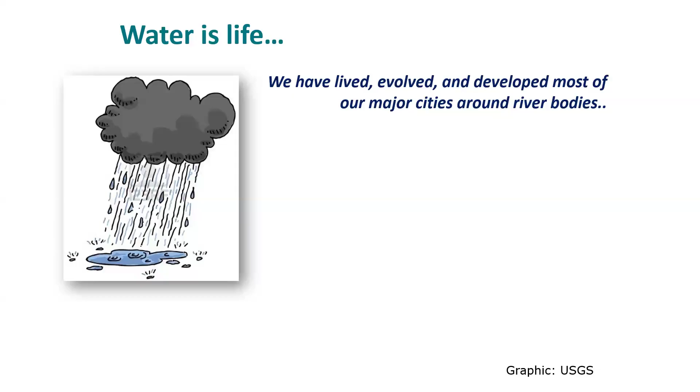Water is life. We have lived, evolved, and developed most of our major cities around river basins and river bodies. Take Accra, for example, you have the Odaw as one of the major rivers or basins. This is a familiar sight, and flooding is not restricted to Accra or Ghana, it's all over the world. But not so familiar is the fact that we have a lot of trash, and in this day and age, kids swimming in trash is very deplorable. To really solve a problem, you must understand its origins, sources, causes, evolution, and current state in order to chart more sustainable solutions for the future.

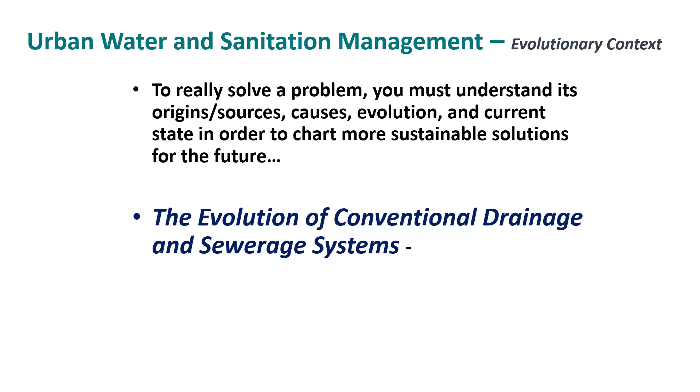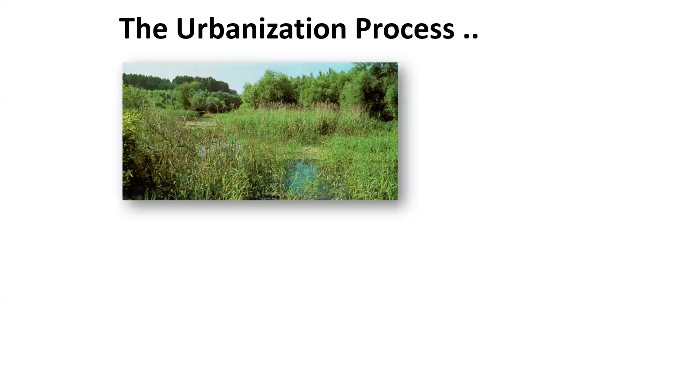So I want to start by talking about the evolution of conventional drainage and sewerage systems, because once we understand that, it puts the current situation we face into perspective. The root cause of all of this is the urbanization process. What's the urbanization process? It's taking a landscape where, when it rained, it soaked into the ground and natural drainage occurred, and building on that land. The way we build, everybody takes a plot of land and completely builds it right to the boundary wall, with no space left on the lot. Increasingly, we need some kind of infrastructure to address drainage and wastewater issues, and that's the canals and channels we build for stormwater drainage and the like.

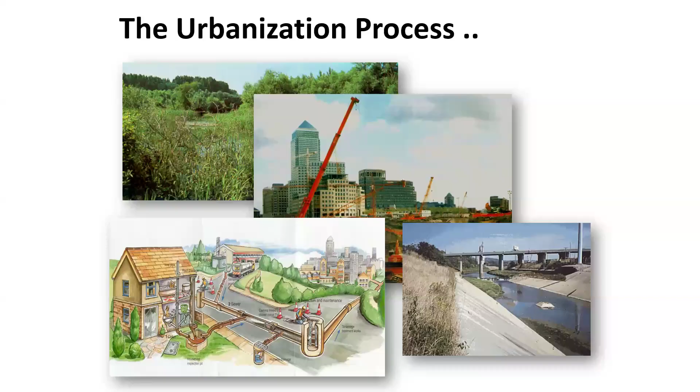The evolution of conventional drainage and wastewater systems has been, in my view, one-dimensional. When you look at the history of its evolution, we started off with open channels in places like the UK, and then potable water came to homes. They connected wastewater into the open channels, which created problems of smell, so they covered up the open channels, that's how the sewer was born. That open channel then conveyed water to a watercourse, and with increasing populations, the watercourses became polluted, which is how sewage treatment also started. So you realize it's all in response to a problem that's been observed, we're chasing our tails all the time. When you look at what I call the one-dimensional approach, you realize the focus has been on the wastewater side.

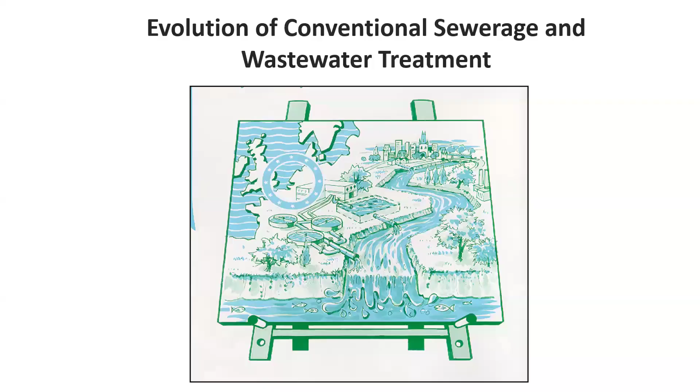So, like I said before, you realize that the issue we face is that the solutions and paradigm governing how we've addressed the problem has been a feedback control system where we observe a non-desirable effect and we try to do something about it. It's been a fight-flight feedback loop. The technologies that have evolved have all been based on reactive, curative problem solving. Let's get rid of nuisance water, out of sight, out of mind. And that's how it has resulted in the kind of drainage systems and wastewater treatment systems we have.

So we need to look at it from a different perspective. But one thing we need to realize is that sewerage systems have made a real difference in our lives. There's this saying that it's done more for mankind in the 20th century than all of medicine. And that's simply because we broke the cycle between humans and their waste. So sewerage systems have done more for mankind than all of medicine. That's what we really got to realize. So this profession is a very important one.

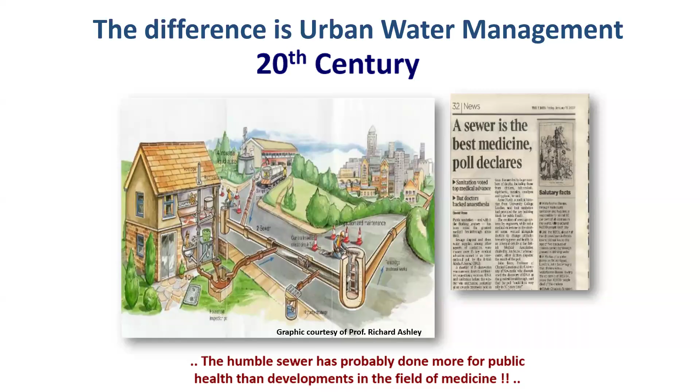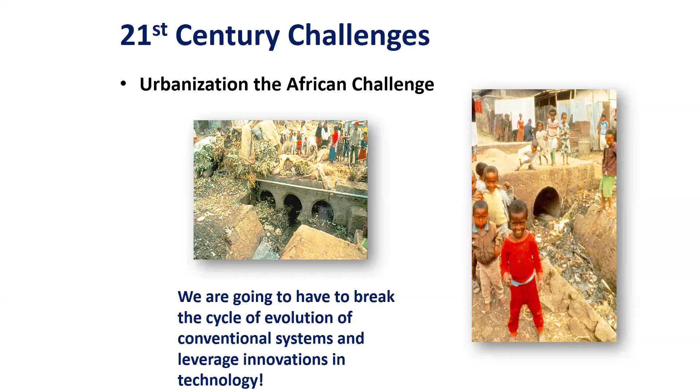Now, in Europe and places like that, they've evolved their systems, so they have sewerage systems, wastewater treatment, and the like. Now, in the 21st century, in terms of the urbanization challenge of Africa, we have a situation where our open channels are also receptacles of solid waste. So my question to us is, are we going to have to break the cycle of evolution of conventional systems? And are we going to be in a position to leverage innovations in technology? That's what some of my talk this evening will be about, how we may be able to leverage some innovations in technology to address this very challenge.

I say we are going to need to move beyond the conventional. What we're going to have to do is address water and sanitation management in an integrated, holistic manner, taking into consideration all facets of the water cycle, including stormwater drainage, wastewater treatment, and also solid waste management. It's really a big challenge.

And if we don't do that, there are lessons from the past. For example, you go back to 1665 or thereabouts, that was the last bubonic plague in the UK, and about a quarter of the population of London died or perished at the time. We've had a scare in terms of COVID, which is airborne, but we really had no scale-intensive waterborne outbreak. But if we had something on the scale of bubonic plague, Accra has a current population of about 4 million, so you're talking about maybe 1 million people dying. It's very serious, but we take it for granted. And it's real, it can happen.

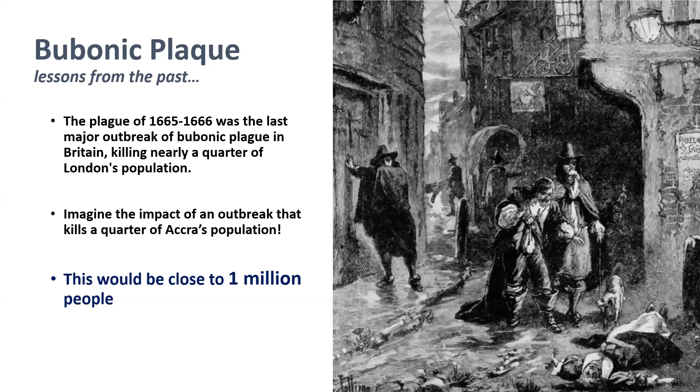So let's talk about integrated urban water management. I have what I call simple equations to describe management. Rain plus drain equals pain. What's this all about? When it rains, we have drains that convey the water, and increasingly, as we have more urbanization, the rain plus drain causes pain, which is the flooding that we observe.

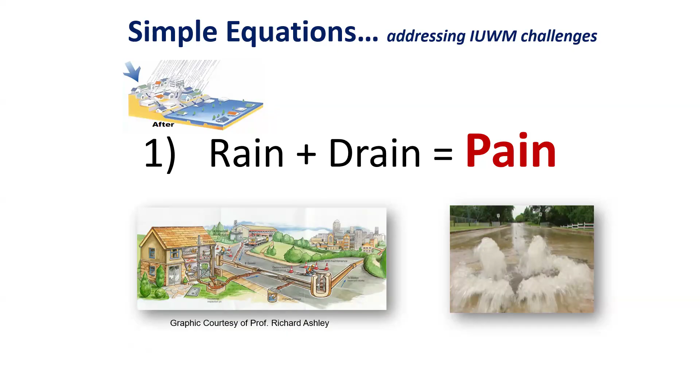Why is it so? It's because we've designed based on getting rid of water as quickly as possible on the basis of peak flow. So those of you who know the fundamental equation you're familiar with, Q=CIA, where C is the runoff coefficient, I is the intensity of rainfall, and A is the drainage area. Your objective is peak flow, and you design your system to convey that peak flow away from the area.

In some catchments, when the catchment is not highly urbanized, the C, for example, might be at 0.3. When you urbanize the catchment, it becomes about 0.9. So you design a catchment initially to have 0.3 as the C, and that's the flow rate. Now, after you urbanize it and get to 0.9, the flows increase threefold, but your drain has a capacity based on the 0.3. I think that's the kind of situation we have also in Odaw and other places, where initially when the system was designed, Accra was not as well developed as it is now.

My equation for addressing the problem is what I call rain plus spin equals gain. And that is controlling the flows such that you don't inundate your downstream system. So upstream control to address the downstream problem. And there are technologies that can help you address that without moving parts, without power. That's where the spin comes in.

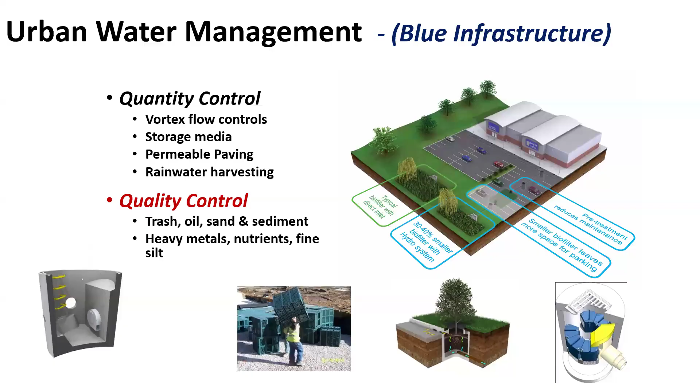And then where you have quality issues, you have filters and the like, but we're not going to go into quality issues, we'll address the quantity.

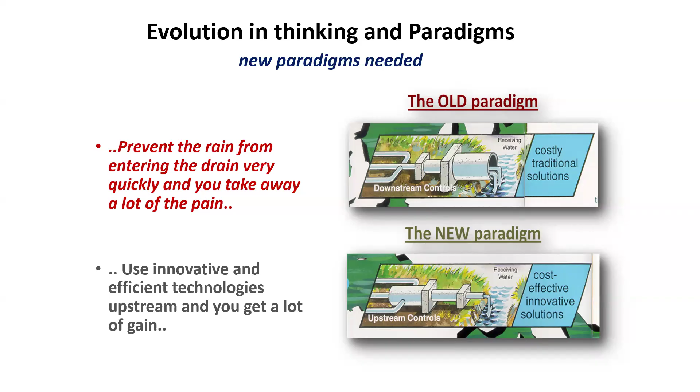Over the years, I have evolved in my thinking and paradigm. The new paradigm I think which is needed is that we need to prevent the rain from entering the drain very quickly and take away a lot of the pain. The old paradigm has been based on downstream traditional solutions, which is end of pipe, which results in bigger and bigger pipes downstream. The new paradigm is use innovative and efficient technologies upstream, and you get a lot of gain. So it's upstream control to address the problem. This is where rainwater harvesting comes in, because it's really going back to source.

Now let's go back to basics. Those of you who've done water have heard about the hydrological cycle. Nature has evolved a balanced hydrological cycle over the millennia, where it rains, percolates to the ground, recharges the aquifer, some of it runs back into the rivers, and then you get evapotranspiration, and it's a cycle.

But in the relatively recent emergence of us, the human race on the planet, we've become such a force of change and influence that we are now impacting and interfering with these cycles on an unprecedented global scale. Our ancestors walked very lightly on the surface of the earth, but we are impacting it in a major way.

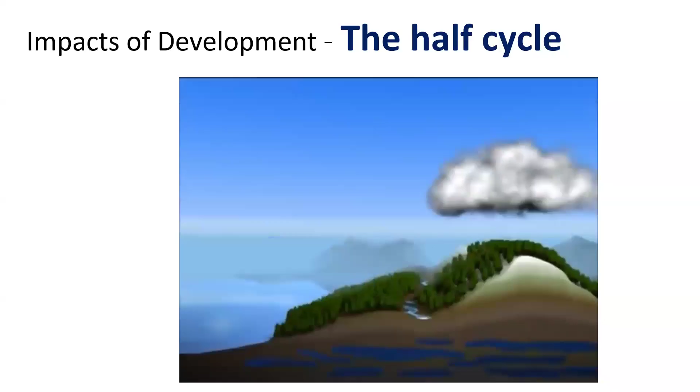That's a full cycle. But what we've been doing is making our catchments bare, in the sense that we've been stripping the forest zones. And what that does is that instead of getting the full cycle, we now get what's called a half cycle, in the sense that the water runs off quickly into our streams and does not recharge our aquifers.

So I believe if we take a close look at our groundwater sources, what we might find is that they are being depleted and not recharged, and we're getting increasing runoff from our surfaces, causing flash floods downstream. That's the half hydrological cycle. We're not getting the full cycle because of our urbanization process.

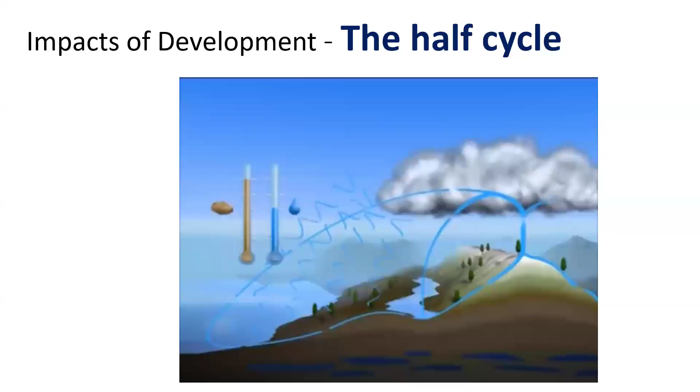So the effect of urbanization is, after development, you get flash floods or peak flows and increased volumes of flow. Before development, you had a slow runoff response, but post-development, you have much higher runoff response. And we have to develop our infrastructure to address these increased flows. That's why we need bigger and bigger pipes downstream or surface water systems.

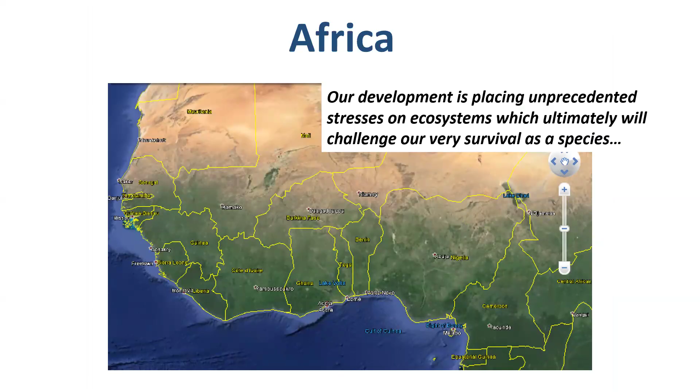Here in Africa, I believe our development places unprecedented stresses on our ecosystems, which ultimately, in my view, will challenge our very survival as a species.

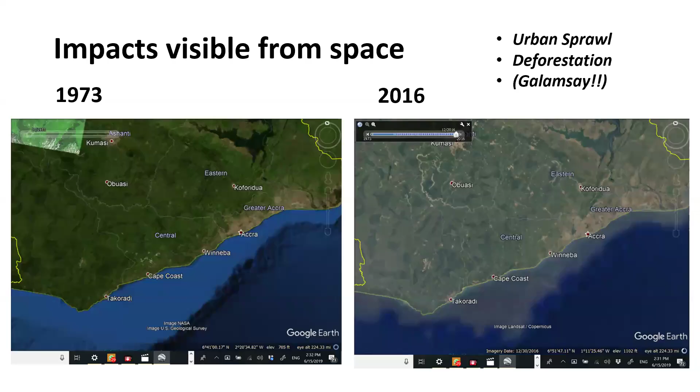Looking at satellite images of our coastline, you go back to 1973, our waters along the coastline were very clean. But now, fast forward to the present, and you see a plume of brown, the effect of urban sprawl, deforestation, and galamsey, all visible in space. You look at 1973, around the Takoradi area, you couldn't see the Pra, but now you go forward to 2016, and the Pra's outline is shown on the landscape. And if you fast forward, I didn't do it for 2025 or 2024, it's even worse. It's all the effect of galamsey.

So the effects are now visible in space. It's a serious issue.

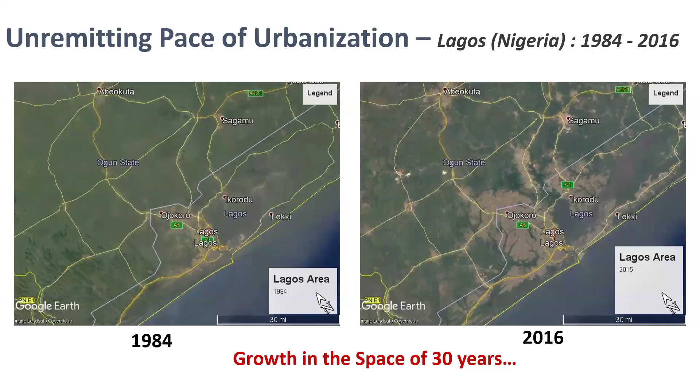The unremitting pace of urbanization is not restricted to us here in Ghana. You take Lagos, for example, 1984. So in the space of one generation, the areal extent of Lagos has expanded way beyond its original borders. The same thing is happening here in Greater Accra.

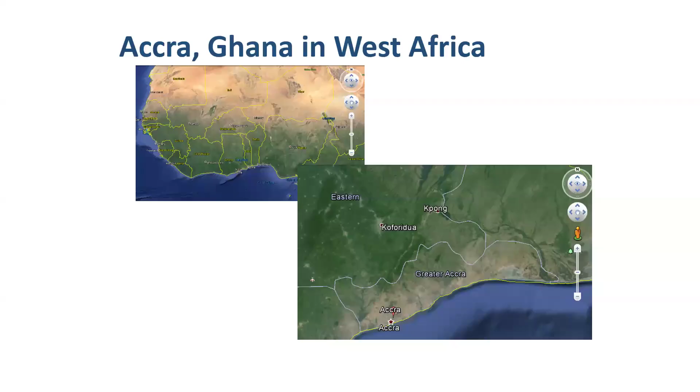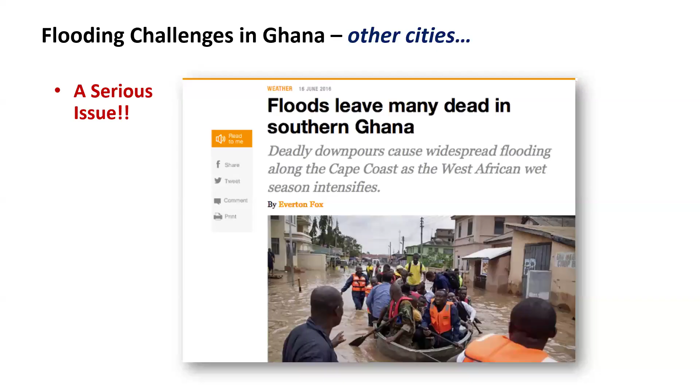We go back to flooding that's occurred, this is 2016. We are all familiar with the flood, so I won't make that point here. But the point I want to make is that floods leave many dead in Southern Ghana. It's a serious issue. Lives are lost.

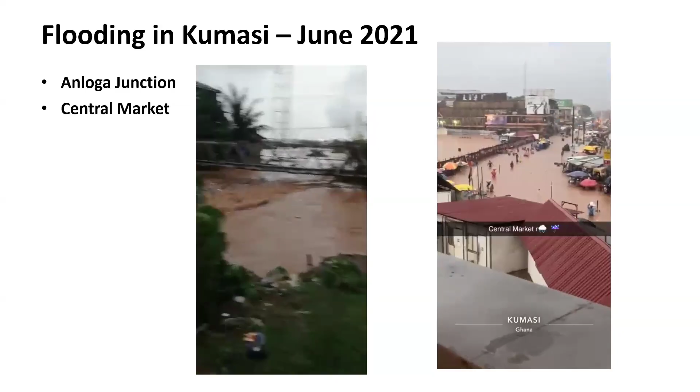And now, increasingly, we're getting flooding in places like Kumasi, Anloga, and near the central market, stuff like that. So it's a real national issue. There's a tendency for us to just want to live out of sight, out of mind; flooding occurs, and once the rains are over, we say, oh, we don't need to do anything. In Nigeria, Lekki, which is like East Legon, they get lots of flooding.

So, Sub-Saharan Africa's particular challenge. In Sub-Saharan Africa, infrastructure development lags significantly behind other developing nations or regions. This, in my view, results in fragmented service provision, with very limited access to services for Sub-Saharan, largely urban slum populations. Beyond the direct impacts of poor infrastructure, the lack of engineering capacity is also believed to hamper economic growth in several ways. The limited capacity of local providers has led to widespread reliance on foreign engineering contractors.

And as an institution, this is a real challenge for us. A lot of major projects are being done by foreigners. And really, it's about time that we step up to the plate. Furthermore, the reliance on foreign firms can result in capital flight and rules out potential employment opportunities from the local market.

Lack of engineering capacity poses limitations on Sub-Saharan Africa's ability to use abundant natural resources to harness the power of science and innovation to meet development objectives and be competitive in international markets. That's a real challenge because when some of these projects are conducted, there's a lack of transfer of know-how. So we need to keep going back to the foreigners. And that, to me, is a major challenge to us here as an institution.

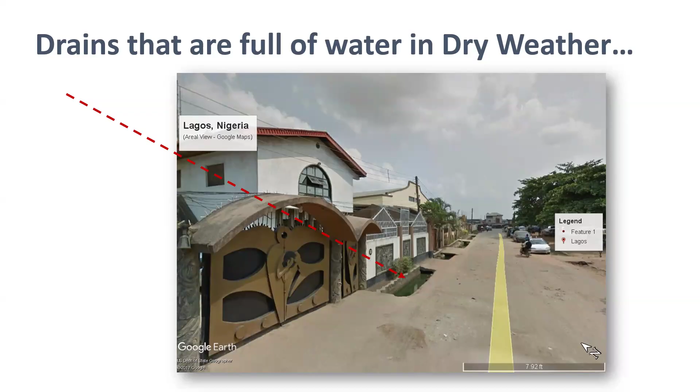So we have infrastructure that is not fit for purpose because you have a stormwater drain that's full in dry weather. So how can this function as a stormwater drain when it's full of water in dry weather? Then we have drains that are full of sediment and trash. So reduced capacity. How is this going to convey the stormwater?

And then we have stormwater drains that go to a dead end. So I followed this on satellite, and then they came to a dead end. So obviously, it's conveying the water into this development. So that's one of the challenges we face in terms of the kind of infrastructure we have to do with stormwater.

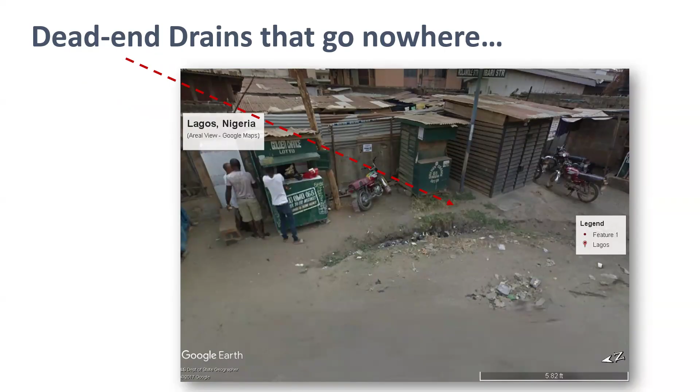And this is deplorable. It's the low-income neighborhood in Lagos. But before I saw this slide, in my travels, the worst river I'd seen was in India, Bombay. And I thought that was the worst river in the world. But then when I started to see this kind of thing, I believe we also have major challenges in Ghana.

I take a lot of insight from a guy called Viktor Schauberger, who's obviously passed, an Austrian. And he says that we move things the wrong way. We need to change the direction or reverse the direction. And urban drainage the natural way is key. What's this all about? It's the principle of prevention rather than cure, and looking upstream rather than downstream. The tendency is to look at where the problem has manifested to address the issue. Instead of doing that, look for preventative ways, look for upstream controls to address the downstream problem.

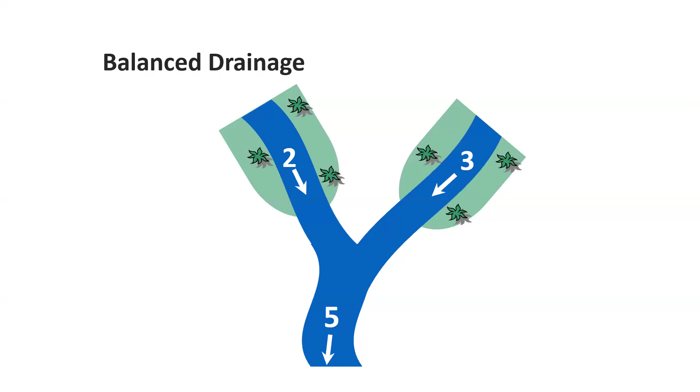Instead of 2 units on the left, we now have 3 units because of the development. As we continue to develop, those 3 units might become 5 or 6 or more. The one on the right, instead of 3 units, now we've developed, we have 5 units coming down. But the existing system downstream only has 5 units of capacity. So obviously 3 plus 5 is 8, which is greater than the 5. And what happens then? You get flooding of 3 units,

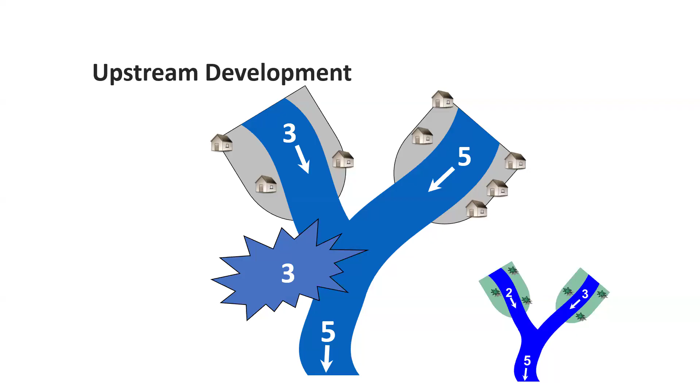and that's the kind of situation we have where you have the confluence of two catchments with development upstream causing downstream problems. And the conventional solution has been, well, we either need 3 units of storage where the flooding occurs, or we need to increase the size of the downstream system. So take one like the Odaw catchment. To increase to 8 units means you need to build a bigger drain all the way to the sea, to the outlet. That's cost prohibitive. It's impossible to do that.

Or you need a big detention system. When you look at the GARID project, for example, they're looking for detention systems, I think, around the Atomic area. So that's to store that 3 units of excess flow so that the existing 5 units downstream capacity can be utilized. You store the 3 and you have the 5. So that's one way of dealing with the problem.

But there are other ways that mimic the natural drainage balance system, in the sense that you move further and further upstream. So where you had the 3 units, you put in some controls to attenuate the flows to 2 units. So you have 1 unit of storage there. On the right-hand side, you have 2 units of storage. So you have 3 units coming down. So you've controlled or attenuated the flows to 3 units. They combine, and your system can operate. And that's what we call upstream controls.

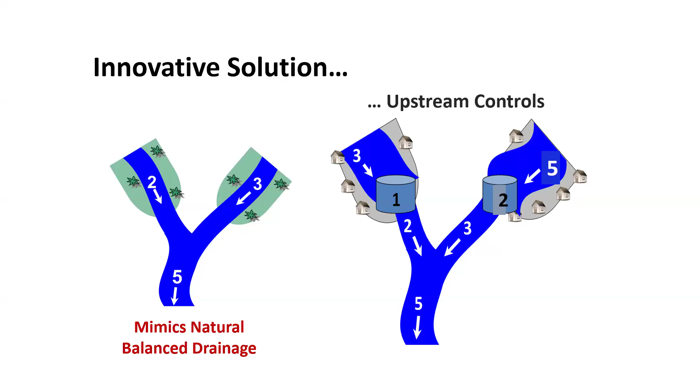And these upstream controls can move further and further upstream, such that you can do it at a household level. And this is where rainwater harvesting comes in. So the conventional approach has been based on downstream controls to get rid of the water as quickly as possible, go to a centralized system. And that has been very costly and may not be very effective in terms of flood resilience.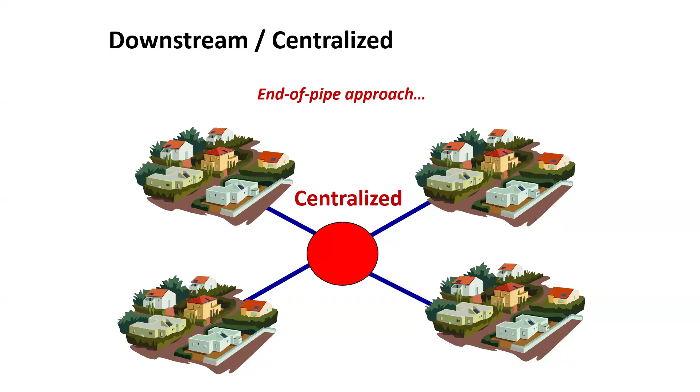So when you change direction, instead of an end of pipe approach, you may move upstream to decentralize at small community level, where you have developments, for example, housing estates, where once you put in the estate, you control your post-development runoff within the existing capacity. So your housing development has no adverse impact on the overall system. This is why I call it decentralized at small community level. This is where we have opportunities for flow control upstream of the catchment.

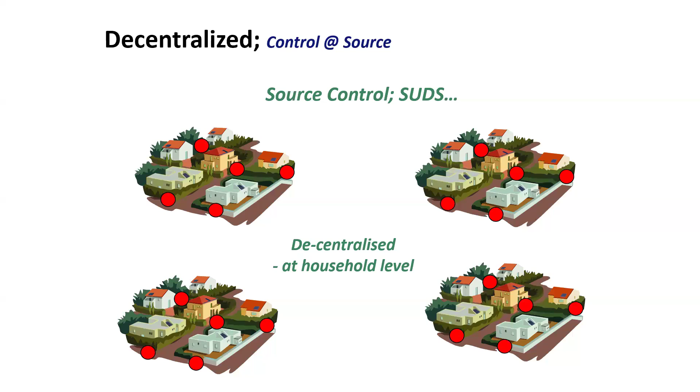But when you've developed your catchment completely where there's no space for water, then you might have to go to decentralize at the household level. This is where rainwater harvesting comes in. I believe here in Ghana, particularly in Accra, we've got to the stage where we have no space for water, and we really need to go decentralized at source. This is why I'm advocating that we have a national rainwater harvesting policy, because we've run out of space, and I'll come to that in a bit.

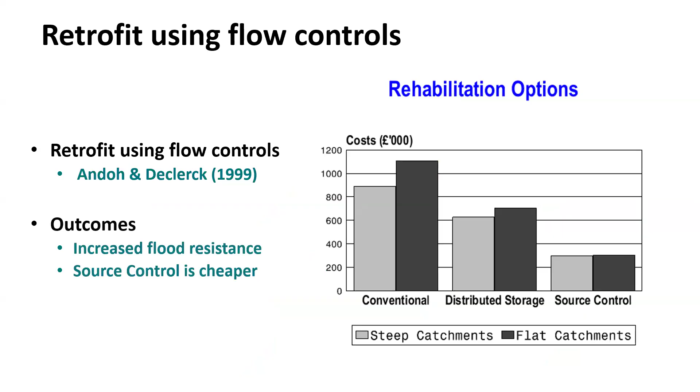But this is an output from work I've got one of my students to do, looking at catchments, conventional versus decentralized. And basically what it highlights is that as you move further and further towards the source, your overall costs become much smaller and your system becomes more resilient to flooding, with increased flood resistance, and source control being cheaper than the conventional drainage system. What allows you to do this are some of these devices. I won't go into details of them, but you can use them right from drains to rivers. And they control the flows within the capacity of the downstream system. Very large openings. Let's go back.

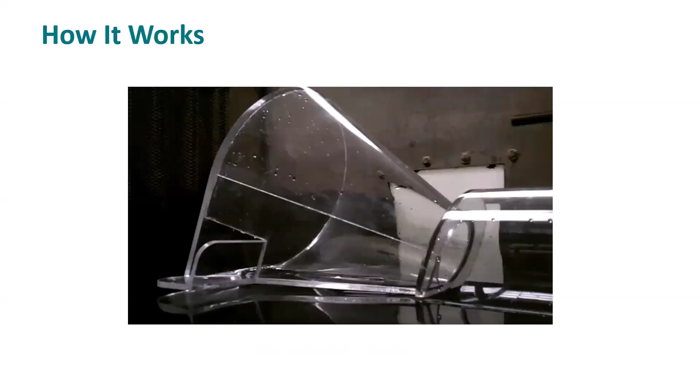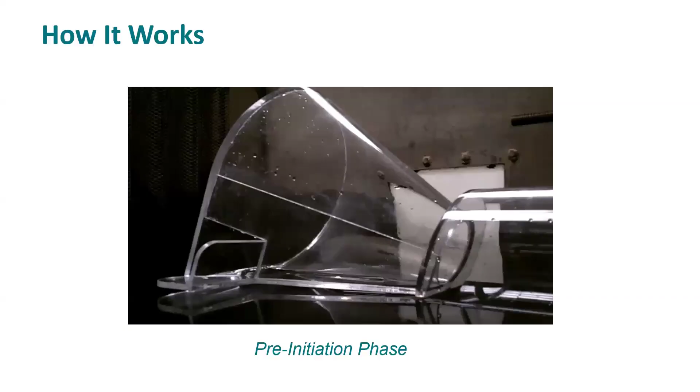So it's a device that's very passive. It sits there in the drain, and when it starts to rain, it will drain the water downstream, but it will be able to resist or restrict the flows as the pressure increases. What you find is that the shape of the device is such that naturally a vortex will form.

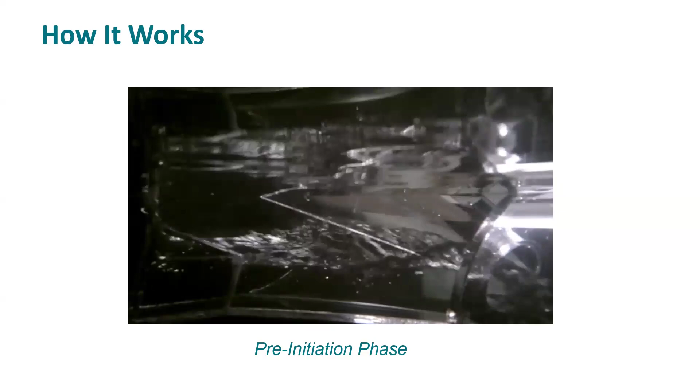So as your rains increase, you get to a stage where in a conventional system, you would have increased the flow downstream. But here, what happens is a vortex is initiated and the spin causes a low air pressure zone. So an air core forms in the device, and that acts as a brake. That's why it's called hydro brake.

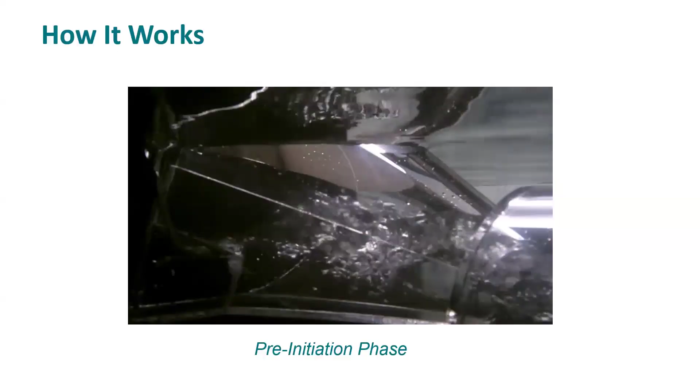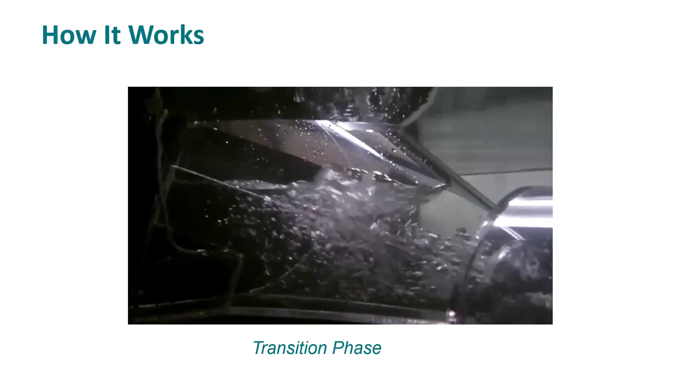It naturally initiates just based on the flow regime. So you're limiting or throttling the flows downstream to within the capacity of the existing system. Naturally, without any moving parts, without any need for power. It's all hydraulic. So you can see as the storm intensity increases, it gets to a stage where the vortex becomes a very strong central core, and that's the natural brake.

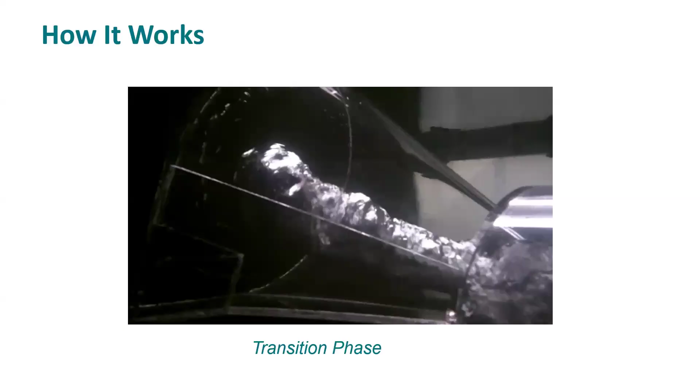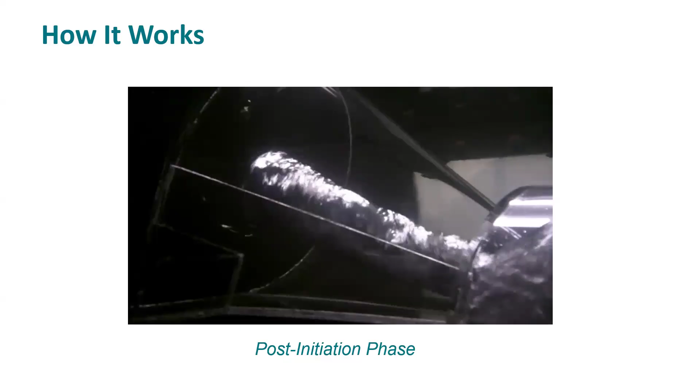So you don't need automated gates and all those kinds of things. I won't go into details, but this allows you to have much larger openings, so the risk of blockages and so on is very minimized. And it's been used on projects. For example, I'll talk about White Cart, City of Glasgow, the UK, where they had a lot of flooding, pretty serious events since 1908. And the reason was that there are three subcatchments that contribute to flows through central Glasgow.

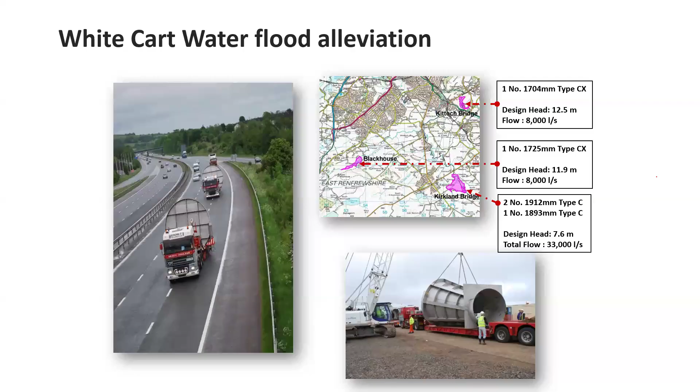And the conventional solution meant you needed to build levees and embankments and stuff like that, very costly, some going through railway lines. They looked at it from a different perspective, upstream control to address the downstream problem. They put in flow controls upstream, and you can see the size of flow controls. And you can see the three different flood storage areas where they put in the flow controls to limit the flow going to central Glasgow to within the capacity of the existing system. And that way, they addressed the flooding problem in Glasgow. So back to upstream control to address the downstream problem.

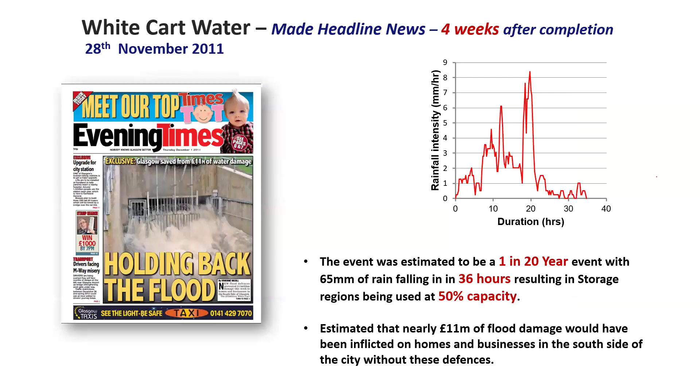It's an example of one of the storage areas. So you can see the flow control where it's going. And so basically what you do is you inundate land. This is just post-development, showing that it works, but essentially where you have land upstream, this is under dry weather flow conditions, natural stream, and then obviously use the flow control to limit the flows and mobilize storage upstream. But this is where you have storage ability in terms of this land and space.

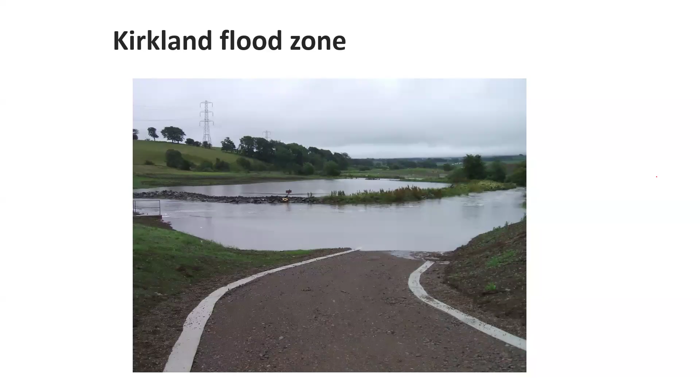Here in Ghana, maybe we have some kind of space available at Atomic. I think it's very limited. I believe we're looking for about 600,000 cubic meters or so of storage. So it's a proven technology for addressing flooding in terms of flow control. So that's where the rain plus spin equals gain comes in.

In a non-controlled catchment, you get flows coming in and they are uncontrolled. So the downstream sewer is inundated, pressurized. But on the right, with the vortex valve, you limit the flow to within the capacity of the system. You have to mobilize temporary storage upstream that addresses the flooding problem.

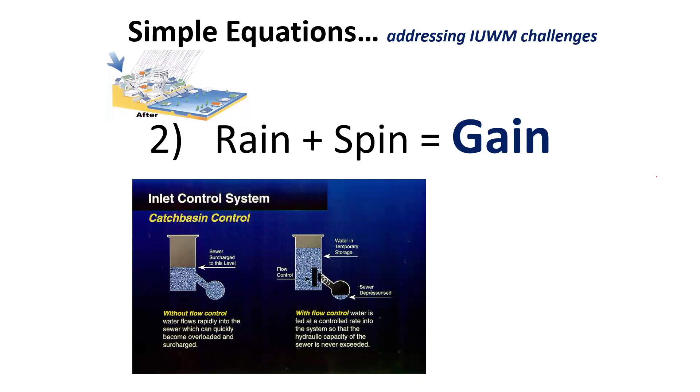So let's look at Accra's drainage basin. This is work that we've been doing. I've collaborated in the past with Engineer Francis. We've been talking about this for quite a while. The first time we looked at this issue, we looked at the Odaw Basin, but there are several different basins. There's the Densu, there's the Sakumo, and there are all sorts of basins.

But you realize that all these basins have natural drainage channels. But if you look, you see that probably we've developed, and I'll talk about one development later on, such that some developments are actually blocking the natural drainage paths. And obviously that's causing issues with regards to downstream flow and flooding.

I looked at addressing the problem of why are we seeing increasing floods in Accra. And the first hypothesis was the rainfall patterns must have changed. We've got increasing rainfall, climate change. So I got access to data records starting from the 60s to 2010. And I think this study needs to be extended because we should have more records.

But what I found from that data was that we had a bimodal distribution where we have one major season around May, June, July, and then another minor season around October, November. And that the rainfall patterns have not changed. So we cannot blame climate change for what we observe.

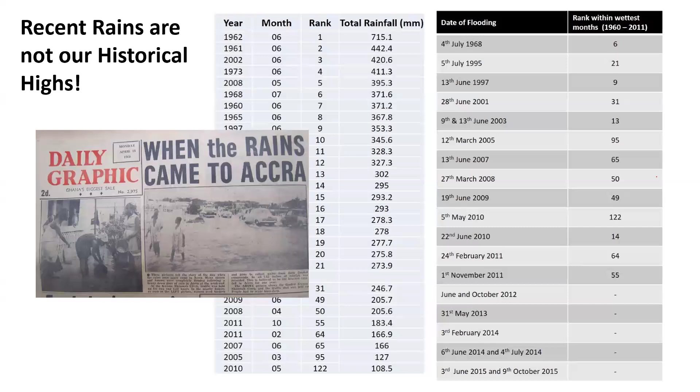Secondly, I ranked the rainfall and I realized that the rainfall we've seen in more recent years were not the historical highs. We had events that are much higher than what we see in current times. So Accra can come to a situation where it sees an event that causes major issues with the kind of floods we see now.

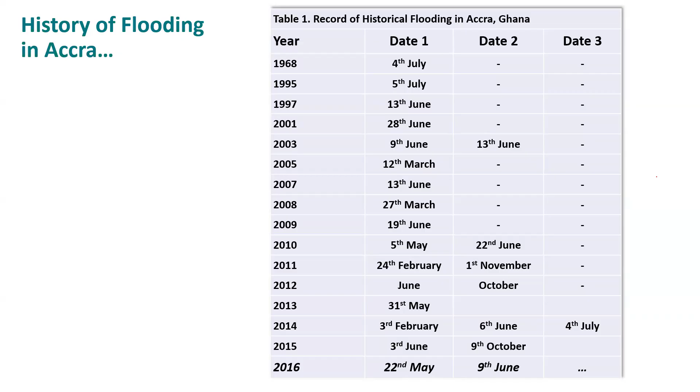We're not seeing our historical highs. But the other thing that became interesting as a pattern is in the past, you go for several years without a big flood, maybe 2 years, 3 years. But after 2010, we're getting situations where we get multiple floods in a year. And in more recent times, it's been worse, where we're getting up to 4 or 5 floods in a year. I need to update this, but I'm sure 2024 was no different. We probably had flooded 5 times or more.

And looking at the historical records, we realized that it looked like 2010 was a year of significance in the sense that it was after 2010 that we were seeing a lot of flooding, multiple events in a year. And I thought, what happened within the catchment that may have contributed towards this was the project called the Korle Lagoon Ecological Restoration Project, which was completed in 2009 at a cost of 90 million, where we did some recanalization and built an interceptor for trash. And we built some gates at the outlets. And I believe that this may have contributed significantly to the problem we face, in the sense that it reduced the capacity of the outlet, in my view, with those gates.

So that's 2010. But also, interestingly, this is work done by Kofi Ackom. He's a lecturer currently in the University of Ghana, I believe. He did this as part of his PhD. Looking at the pace of urbanization in the Odaw catchment, in 1991, you had only the lower portion of the catchment urbanized. But increasingly, as we went to 2002, you see that it's only the Achimota area, and we're moving more and more towards 2013. We only had the Achimota area, and we're close to Aburi.

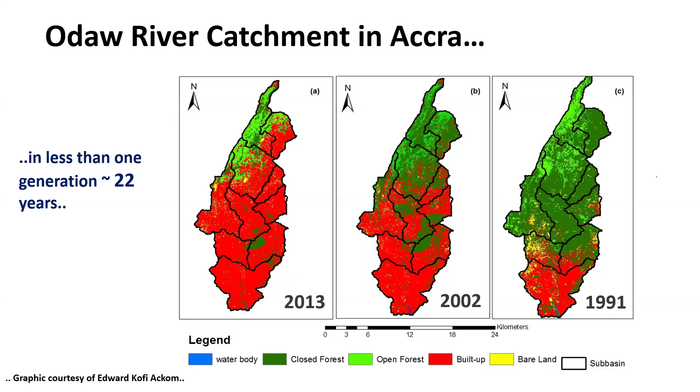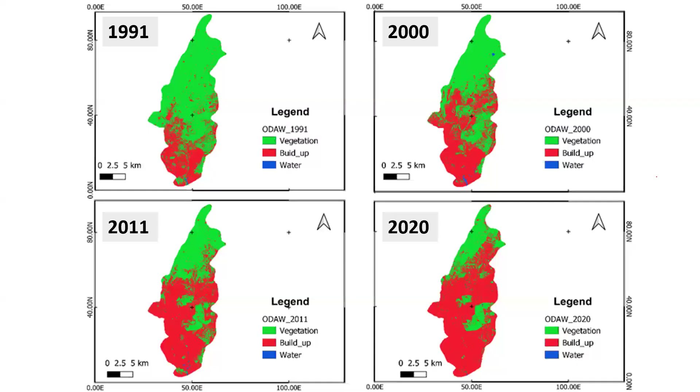That was 2013. And then I got another student to update that and take it to 2020. You can see that, again, he saw similar trends. It's only around the Achimota forest area that's green. And I think what he also looked at was the proportion in terms of vegetation and built up area. And you realize that around about 2010 was when the balance flipped, so you had more built up area than green. In 2020, you had about 70% of the catchment being built up, with only 20% or 30% being green.

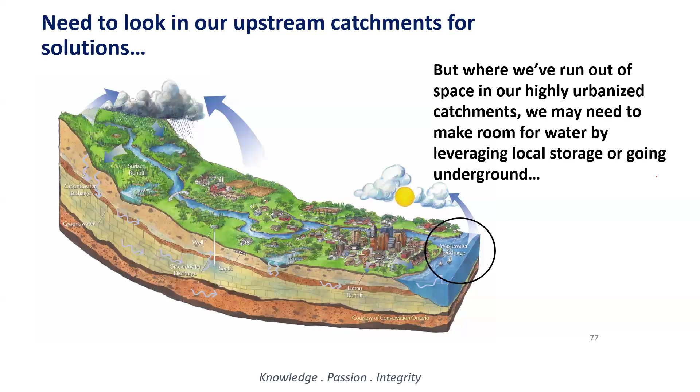What do I mean by local storage? Local storage is rainwater harvesting. That's why, to me, it's a mandatory national policy that needs to be enacted. That's one of my key recommendations from the beginning. We went all the way upstream to Aburi. This is just a graphic to depict upstream and downstream.

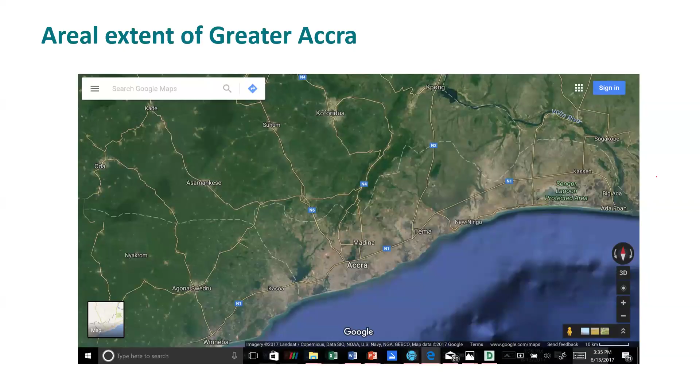One of the exercises I did, this is going back to 2016, was I was looking for areas where we may be able to leverage flow control and attenuation storage. So there's an areal extent of Greater Accra and zooming in some areas. And then when I looked around, one on the left is the Densu, and then you have the Achimota Forest.

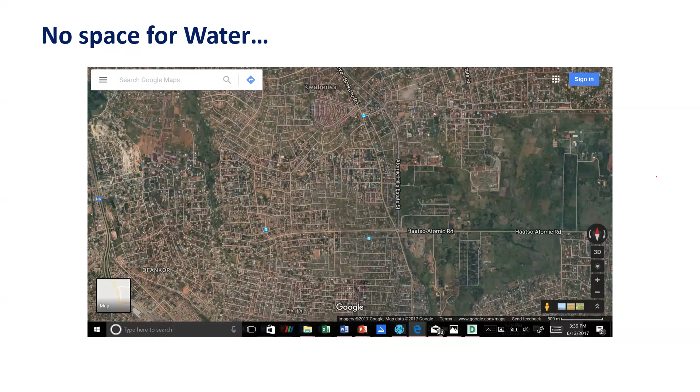There was really no space in Accra. It meant you needed to look further upstream. Apart from the Achimota Forest area, there was no green, fully developed. There was really no space for water. We've developed the catchment completely. And even Achimota Forest is subject to encroachment. Given a chance, we'll develop that whole area. So no space for water, really, is what we're faced with.

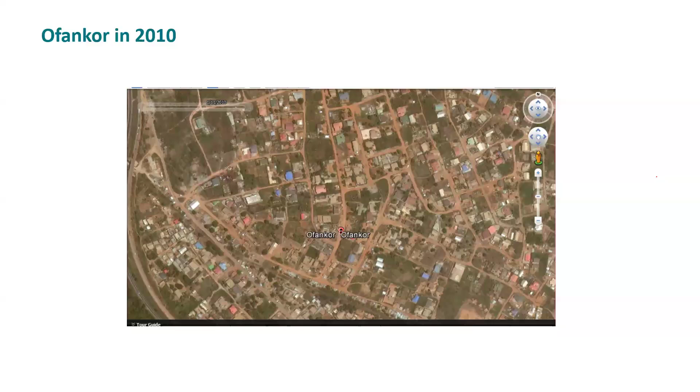Looked at this. And then I went to a place like Ofankor, looking back to 2010. Ofankor, prior to 2010, let's put it that way, there were opportunities that we could have done things there. But now, fast forward 2010 and then 2015, completely developed. Every piece of land we find, we need to develop it. We build. Everyone wants to do a project. That's the challenge we face. We made no space for water.

That's why I say we need to look at doing something locally. Now that we've run out of space in highly urbanized catchments, we need to make room for water by going underground.

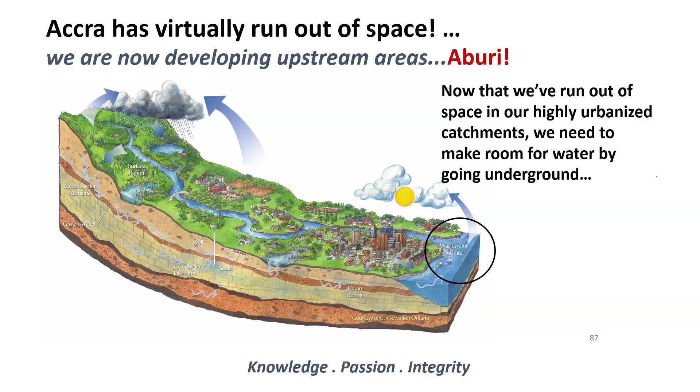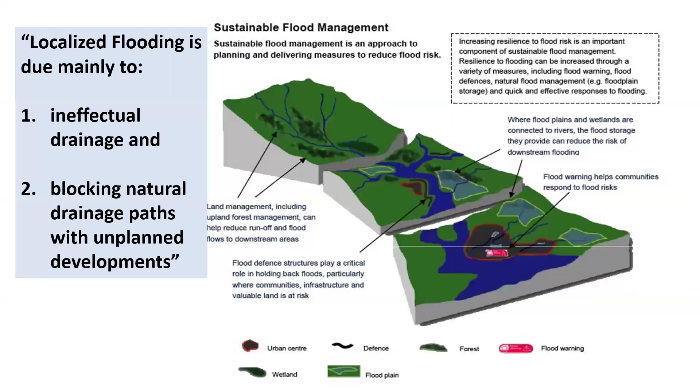The other challenge we face is blocking of the natural drainage paths. Some of the developments actually build very close to the natural drainage path, which is the floodplain. We build on the natural floodplain, and then we block the paths. I was looking at places like Haatso and so on and so forth. Those places are upstream of the main Odaw channel, but those places flood. And there are places where when it rains, you can't get home.

Because it's ineffective drainage, once it starts raining, you don't get home quickly. You're not able to cross and get home. So these are real challenges, very real.

And then we have the GARID project also addressing the main Odaw channel and so on, upgrading the infrastructure. One of my concerns, I think I came across the current project report - one of my main concerns is that we're spending a lot of money reinforcing some of the drains, yet the service level we're designing to is 1 in 10 years.

And when you factor in climate change, 1 in 10 years might actually become 1 in 5 or 1 in 2. So why go through the expense of bigger works that only provide a 1 in 10 year level of protection? Typically for floods, you need at least once in a generation - 1 in 35 years, sometimes 1 in 70, 1 in 100 year protection level. So for 1 in 10, we as an institution should have been up in arms saying that's an inadequate level of service for major works in the country. That's what it is.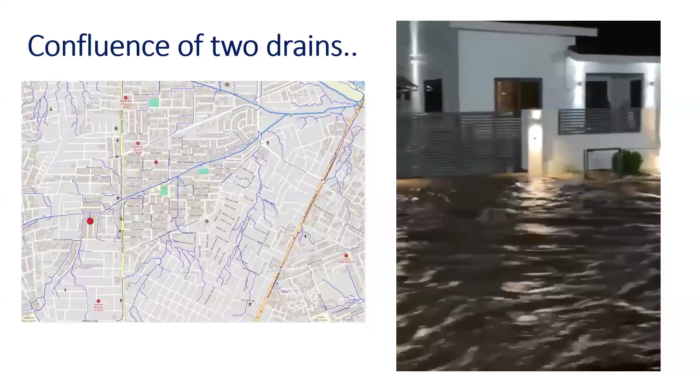And courtesy of some members of the water platform, we looked at modeling the situation. You can see the confluence on the lower left side - the two main drains that converge - and the Traco is the hotspot in the middle. You can see that upstream and downstream of the Traco, there's flooding. So what this highlights is that no matter what you do within the Traco development itself, you don't address the flooding issue. You either need big infrastructure in terms of a tunnel or something to convey the flow away from that entire area downstream, and that will cause the flooding to move or shift further downstream until you reach the river or the sea.

And that's because the upstream areas have developed and no space has been made for water. So to me, one of the major solutions to this kind of problem is if everybody upstream and within the catchment goes for rainwater harvesting. That's how you can distribute the storage required across the entire catchment. So the alternative to major works like tunneling is rainwater harvesting. It's my plea for a national rainwater harvesting policy.

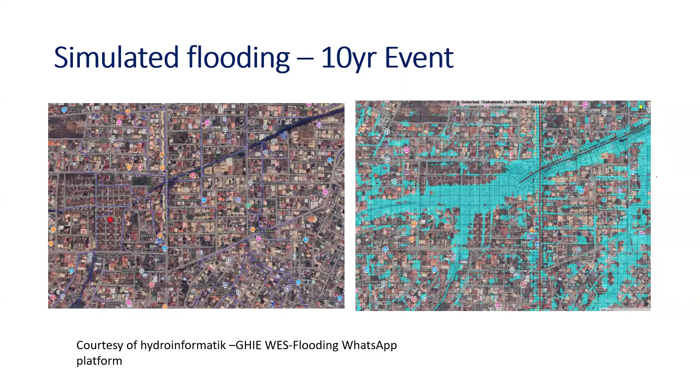And really, when you talk about rainwater harvesting, it's an unharnessed potential for us. This is Nigeria, but it's no different in places in Ghana. The other thing is that rainwater harvesting has scope for improving sanitation - sanitation is the big issue. Now when you look at these two toilet blocks, which is more sanitary and pleasing? The one that has harvested rainwater has water available for washing, so hand washing and stuff like that improves sanitation and hygiene. Look at the one on the left.

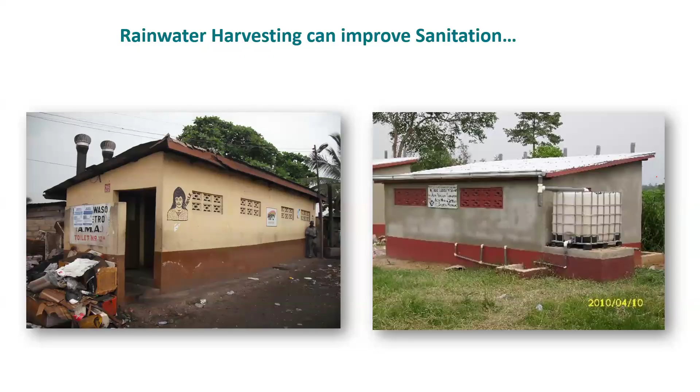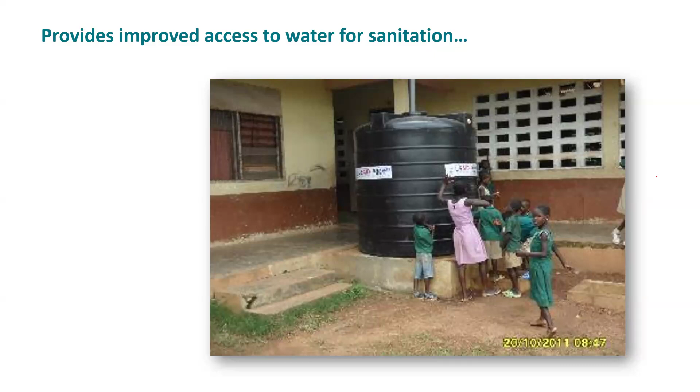There's no water facility available for washing. So rainwater harvesting on a local basis has the potential to improve sanitation, not just address the flooding issue downstream. We need to seriously consider rainwater harvesting. In my view, in addition to making water available for improved sanitation, I mentioned earlier we had situations where fire attendants get to a site and there's no water available. If we have rainwater harvesting on a nationwide basis, water storage will be readily available locally everywhere, and this can help address the challenges faced.

So we're going to look at controlling runoff at source and making space for water in our environments. When we do that, we can help start beautifying our landscapes. We don't have this kind of beautiful landscapes with clean water. But also, it has the potential to spur innovation and business.

Because people have to build tanks, and for large commercial areas, you need multiple tanks. In the village setting, you could use earthenware pots to do the storage. Even at the household level, you can incorporate rain gardens and stuff like that. Have your herbs planted closer to you, vegetables and the like. Incorporate that into your development.

I firmly believe it has scope for creating local jobs. If we have rainwater harvesting as a policy and create an industry based on that, we can export that skill base into the sub-region, because we'll have the first mover advantage. We'll have all the expertise and know-how in managing these kinds of systems. So that's my plea for rainwater harvesting across the board nationally.

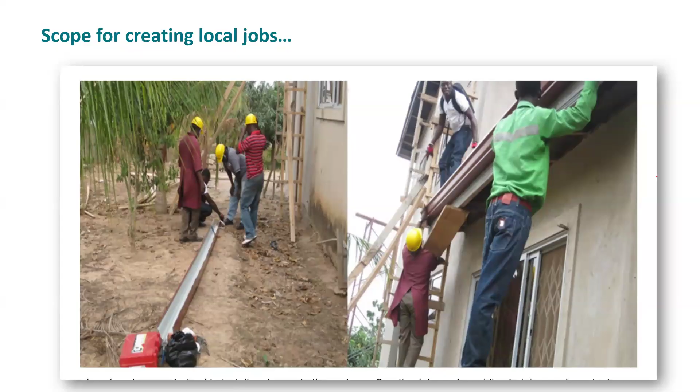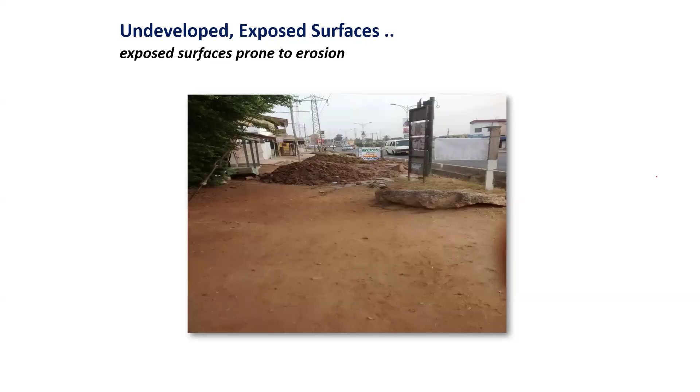Now, to the other challenge, we have a lot of exposed surfaces. One of the major challenges we have is erosion, or sediment getting into our drains and channels, hence the need to dredge the likes of the Odaw every year and so on. When you go to the Weija Dam area, the Densu catchment, there's a lot of erosion. And I believe the Accra-Winneba Road occasionally has issues or challenges with sediment.

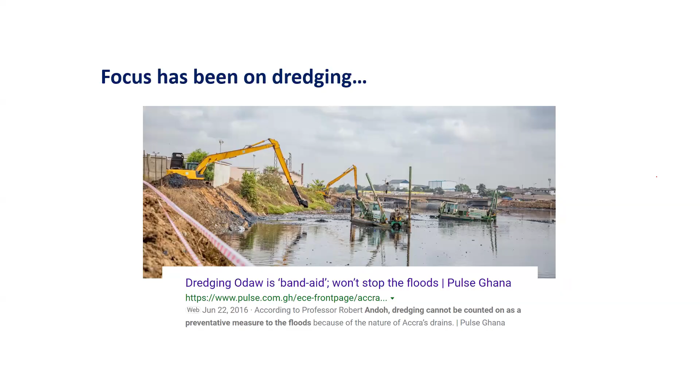I recall going back to 2016, when I started looking at the issue of floods in Ghana and what can be done, I was interviewed by Pulse at the time, and I said the dredging of the Odaw was a band-aid. It won't stop the floods. Since that time, they've been dredging Odaw, and it hasn't stopped the floods. So really, we need a different type of solution to the problem. This was the quote of what I said.

Dredging could not be counted on as a preventative measure to the floods, because of the nature of Accra's drains.

We have a lot of exposed surfaces. The more exposed surfaces you have, the more erosion you will get, which will wash sediment into the drains. Part of this issue is that we need to address and prevent erosion of sediment into the drains in the first place. Dredging is like a band-aid. Are we going to be dredging every year? At least at the time - this is going back to 2016 - I believed we could be very innovative in the way we address this whole issue about sediment and dredging.

Because I know as part of the GARID project, they're looking at when they dredge the materials, where they put the spoils - to landfill and stuff like that. My view is that we could recover that material as a grit that's been washed. There are technologies that can do that. We have more than 1 million cubic meters of sediment that can be dredged - that's 1.5 million tons - and we could leverage that as building material or resource.

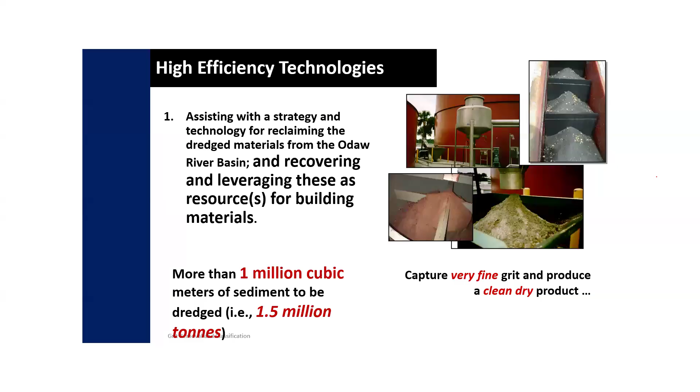There's a young Ghanaian guy called Nelson. He's got a company called Eco Ghana, and I think Nelplast, and this guy needs to be encouraged, leveraged and replicated across the nation. What he's done is use plastics from gutters and beaches, mixing that with sand to get paving blocks or building materials. He's built a house out of waste plastics and sediment. This needs to be replicated across the nation and encouraged, and we could then be exporting this kind of know-how, not just in our low-cost or affordable housing projects, but to other countries across the sub-region.

The other thing I would like to talk about is something that we could use to address the problem of exposed surfaces. We have what I call porous paving, made from concrete blocks, but there is another technology, porous paving made from recycled car tires.

I'd like to demonstrate that. This is the material. It's aggregates from crushed tires, car tires, recycled, and then with a binder. That can be used for paving. But not only that, the paving, when it rains, can help demonstrate this.

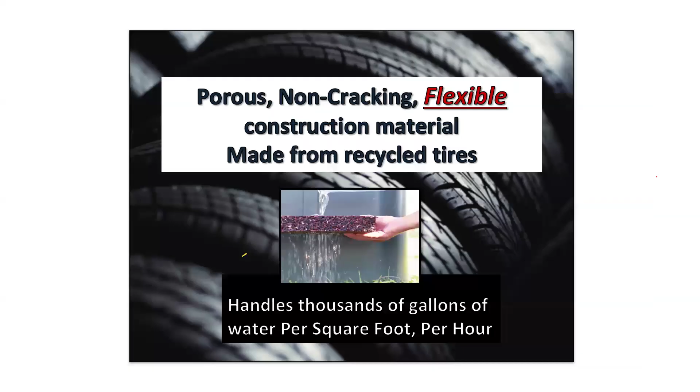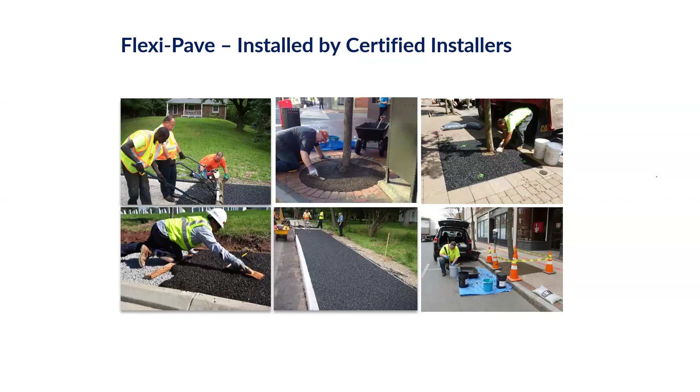And you know, when you look at the construction, it's easily applied. You don't need heavy plant and equipment, so you can use your local labor for sidewalks and so on. Still being hard paved, impermeable surfaces can now start to become permeable surfaces. This is what we need to be looking at as part of our developments: drainage strips, sidewalks, tree surrounds, and the like.

So, talk about what I call efficient transformation. We need to go from looking at our catchments as eyesores to something that's pleasing to the eye, and it can be done if we look at incorporating water within our catchments.

So part of the vision I have is that when we look at the Odaw catchment itself, the Odaw channels, that whole area to Nima and so on, become a pedestrian-only enclave, with the water channeled underground through micro canals, and then the upper surface area can be repurposed for amenity use.

How do we transform our local environments? Starting from A, where we have everything paved and running off. Go from A to B, where we start to do rainwater harvesting, at least that's the first step. And then we'll have tree gardens, shallow depression areas, swales and gutters, more planting, greener environments, making space for water, and living in tune with nature, rather than what we're doing at A and B.

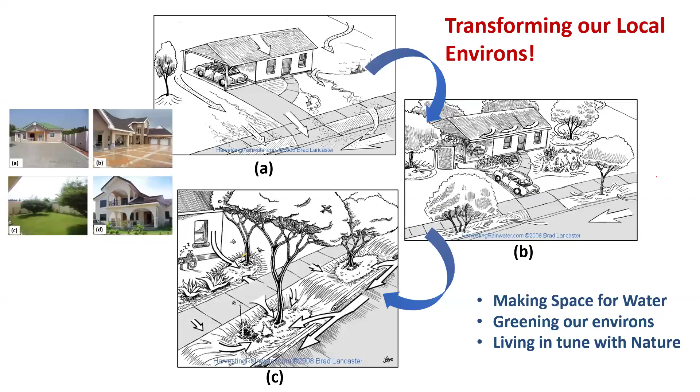We'll try to go back to C and D. So we need to green environments. But rainwater harvesting is what's going to help us, really. So back to my plea for national policy, back to my first slide where I talked about policy recommendations.

The first one was post-development runoff control, not to exceed pre-development runoff. So if somebody, a developer, develops a large estate upstream near Aburi, they may increase the flows going on to the Odaw. Whereas if you had a post-development runoff control policy, putting flow controls and storage, artificial storage within the development, you address the problem so that the impact of the development does not adversely impact downstream areas. So that's the first point.

And then if we do that, some of the other growing cities, Kumasi, Takoradi, and so on, if these policies are instituted, they won't get to the situation where Accra 2010 was a tipping point. They may have space upstream now, but if we don't do anything now, they'll get to the situation where Accra ran out of space.

Then we need to issue a national rainwater harvesting policy aimed at improving stormwater management, not potable use. I've talked about that. But more importantly, I believe we need to establish an integrated urban water utility formulated on a drainage catchment basis, so that utility has responsibility for the whole of, say, the Odaw basin.

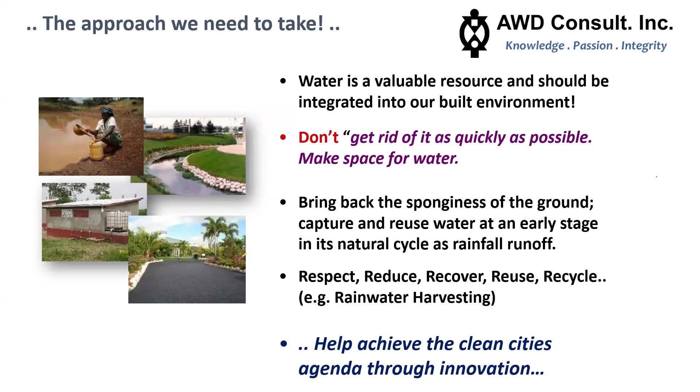Sponginess of the ground, an example is the crushed recycled tires, porous pavement. And we need to respect: reduce, recover, reuse, recycle. That's where rainwater harvesting comes in. And if we do that, it's going to help us achieve the Clean Cities agenda through innovation. So again, back to my beginning slide. That pretty much ends my presentation.